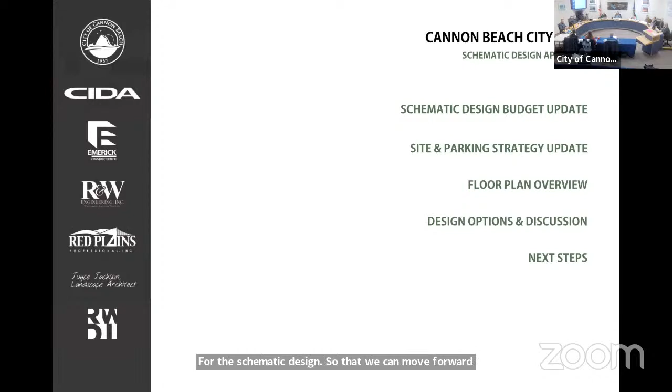To the budget update, what you're looking at here, and what I believe was in your packets on the left-hand side for reference, was the budget that we reviewed in the past, back in March. This was where we were at conceptual design. The budget then was based primarily off of the size, square footage of the building. The current schematic design estimate is where we are now, so more building details, and this represents both projects combined as an overall.

The good news here is that our grand total, even though some things have shifted, is actually slightly less than our initial predicted total budget. This includes both the construction costs and the soft costs. So the numbers we're looking at here are all inclusive of the project, including design fees, jurisdictional and permitting fees, things like furniture and fixtures, and other professional services—some that have already taken place, like the site survey and the geotechnical report. All of those elements are captured here in this overall budget.

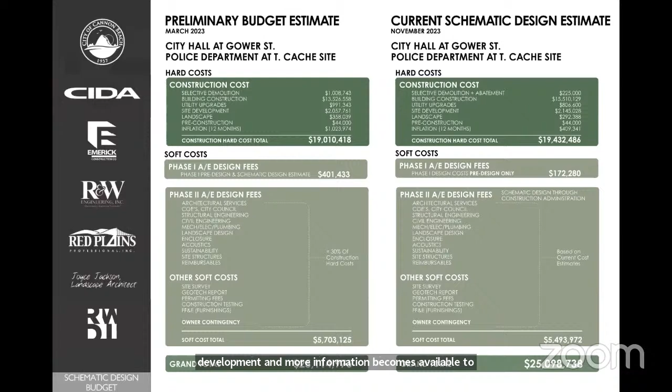Is there a reason the inflation costs were lowered by $600,000? Part of that was we had a little bit of contingency in that initial inflation number. The other part is we were six to seven months further down the road and closer to actual construction, so that was one of those contingencies that was a function of time, and time has moved on, and we're closer to construction.

Thank you. And how about the selective demolition? We had some hardscapes included in that, which shifted into the earthwork side of things, and the demolition, of course, is just for this project, including the abatement. So that's where you see that reduction.

One thing I want to remind everybody is that the initial preliminary design we did, because it was really based on building size and footprint, used a different estimating format called Uniformat, which really buckets everything into four or five categories. Now that we're starting to have plans and additional details, we're into CSI format, which breaks down every piece of the building into 20 to 25 divisions. So if you start seeing some shift in where the dollars were in the initial estimate versus the schematic design estimate, that's why — because we have more buckets to appropriately put the dollars.

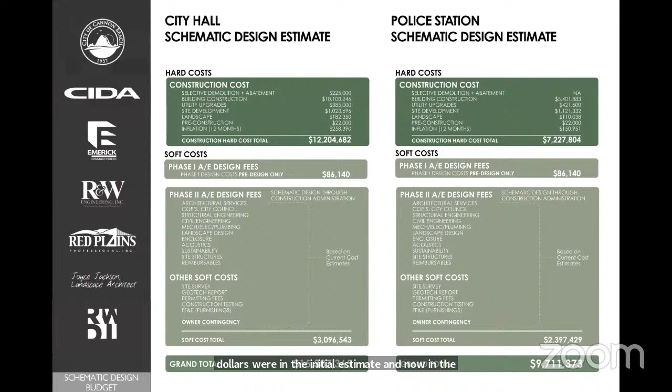Okay, thank you. I have shifted on the screen to the breakdown of the two different projects, the city hall on the left and the police station on the right. Very similar format. These are both the schematic design estimates, with totals at the bottom. The sum of those is what we were looking at on the previous slide.

I think one of the takeaways is that the police station went up a little bit, but the city hall went down, so the balance of the two is actually on track. As we move on, you'll see all these categories populated with numbers as we get to them.

I do want to say, the soft cost piece, although they're not broken out each piece, they are broken out on spreadsheets that we have that we're confirming each of those numbers, and the tally is what you're seeing, but each number is being vetted. So we'll see that filled out.

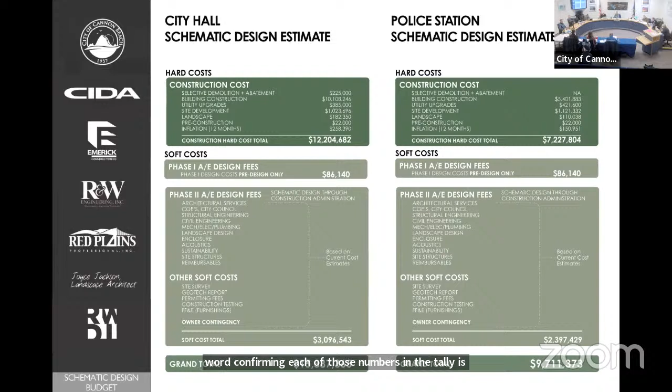Yes, certainly we can do it that way. I think for this format, we thought this was easier, but we have it. Yeah, because as Jordan mentioned, we were carrying that 30%, and we're at that point now. Everything needs to be vetted out, filled out, and calculated so that you have a true number.

Any more questions on the budget side of things? Not at this point for me. I think we're okay.

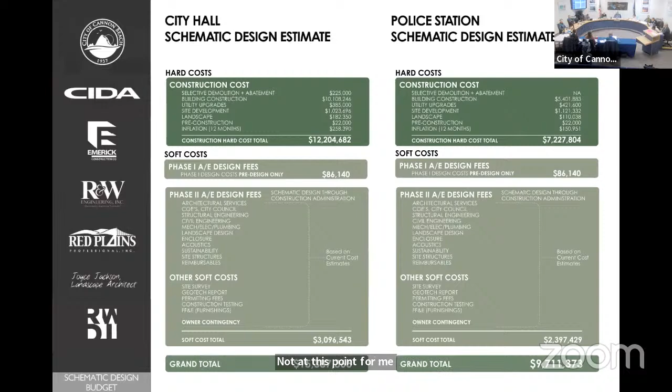So the site here is next. We have been exploring the possibility of adding accessible parking near the building entry. We talked last time about the potential of doing that on the south side of Gower. So this illustrates what we've been thinking and how it might work.

This shows 2 parking spaces added along Gower. They're both parallel parking spaces. One is an ADA accessible space. The second one here we've envisioned to be a time limited drop-off space, so that could be the function of either dropping someone off, dropping off a ballot, or coming in for a quick transaction. That would be our goal.

So the other thing illustrated here is how the slopes might work to make this function. What we've envisioned is that the curbs slope down to the parking level so that there's a smooth transition between those parking spaces and the sidewalk. The sidewalk we've jogged to wrap around those parking spaces. And then the area in a little bit darker gray shaded, that would be sloped to get from that lower area of sidewalk up to closer to the main building elevation.

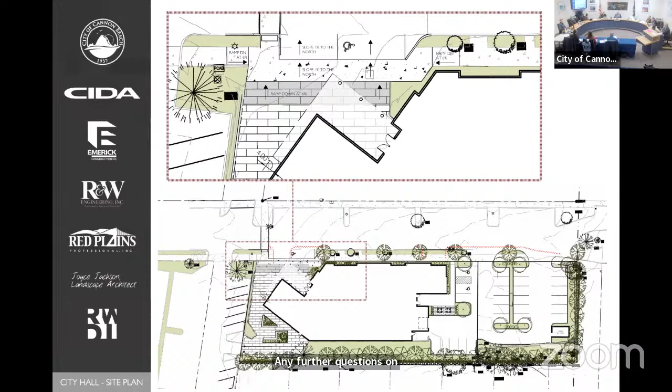And they love it. We don't believe it yet. That's understandable. Boy, I bet HRAP is happy.

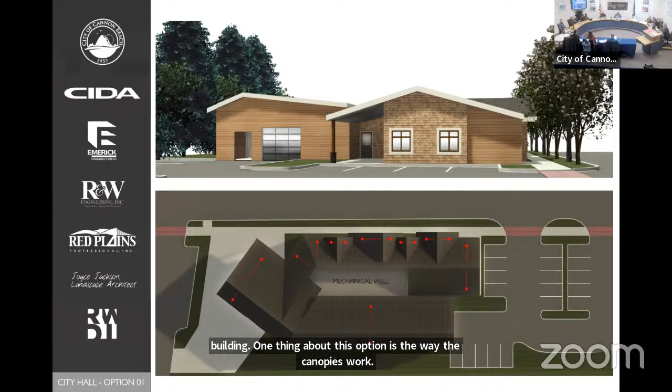What we're looking at here is something you've seen before. This was option one from our last meeting, included just as a reference. This again is option one, the back side of the building. One thing about this option is the way the canopies work - they're a continuation of the roof slope in this option.

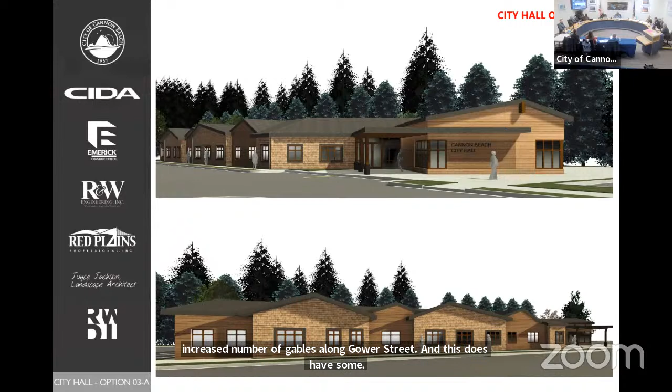Option 3A - this one is new this time. It combines the flat canopy of option two and that weather protection with the increased number of gables along Gower Street. This does have some change in colors. It's got the recessed portion a little bit darker stained cedar, and this one does have the darker trim, which was an element of option two last time.

I knew that there was something that was different. I knew there was something I didn't like as much, and that is the darker trim. I like that white - I thought the white trim really looked much more neighborhoody. So I'm sad to see that gone. Wait just a minute. Me too, please.

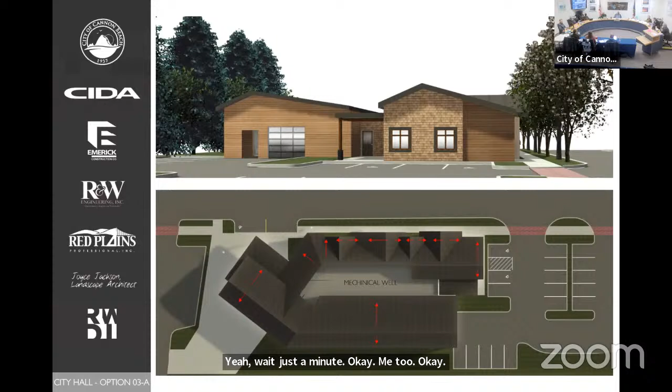So on the back side of this one, we also replicated the language of the canopy and made this canopy on the back side mimic the language on the front side. So it's a flat canopy rather than the roof continuation.

So 3B - this one is similar to what we just looked at, but we did change that trim color to go back to the lighter color. And we increased the contrast, so made that stained color on the recessed portion a little bit darker so that those would recess a bit more.

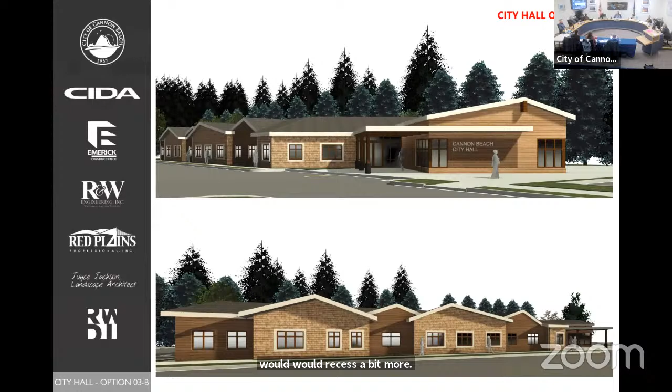Can you quickly go back to the other one, just to the first one? Like an eye exam. You see this one better or this one better? I can bring those up side by side if that's helpful too. No, I'm fine now.

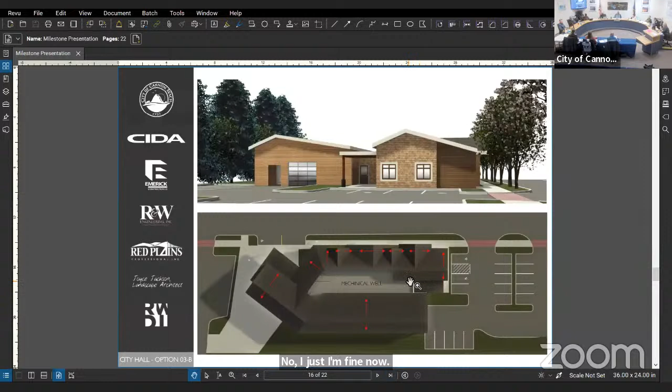Very similarly here, this has the flat canopy at the staff entry to reinforce that circulation spine overall in the building. On the roof here, you can see we still have the mechanical well, that flat portion in the center, which allows us to have the daylighting on the interior of the building, clerestories.

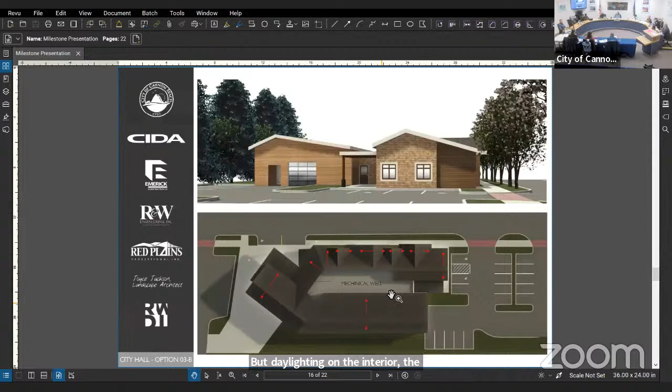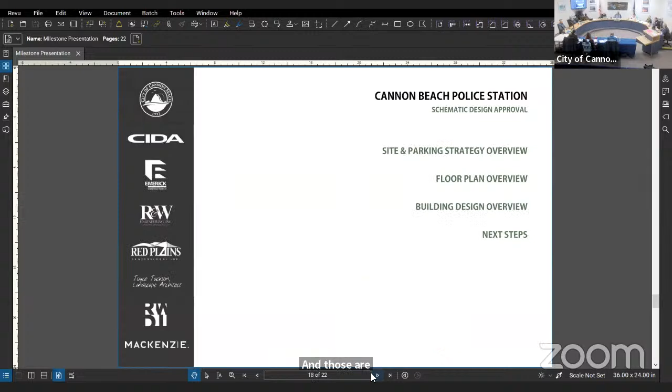And this is the council chamber, again very similar to the previous iteration. And those are the images we have for City Hall. So before we move to police, I can go back to address any questions.

Well, I think that 3B looks the least industrial of all of them, and the least administrative - it just fits more in with the character of the neighborhood. I think it's a good job.

I have a question for council. We have the two projects you were talking about tonight. Do you want to stay on City Hall, ask questions, then make a decision on whether you're ready to release for design development, or would you rather see both projects and then have that conversation? It's better to have the questions after each one, so people online can answer questions. Stick with one at a time. Gary? Okay, that's it.

In that case, I think that completes our presentation for the city hall portion.

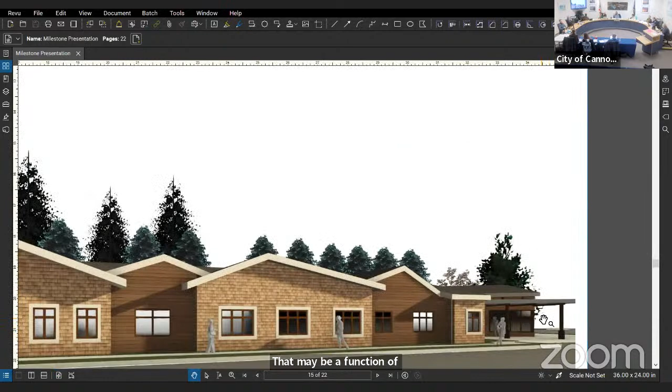I have a question on this one right here. The overhang canopy appears white here, but on the lower, it's the darker color. That may be a function of the shadow, or the sun direction in the image. The intent would be that all of that match, the color of the fascia would match around the entire building.

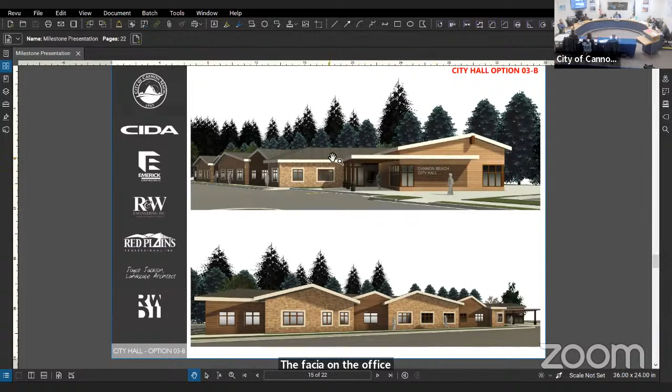And it does line up with the fascia on the office side portion too. Yes, so we've kept an eave height here that is consistent.

I think we're open to public comment and questions, and then we can ask our questions after, if that's okay with everyone. So anyone that would like to make public comment that's in the audience?

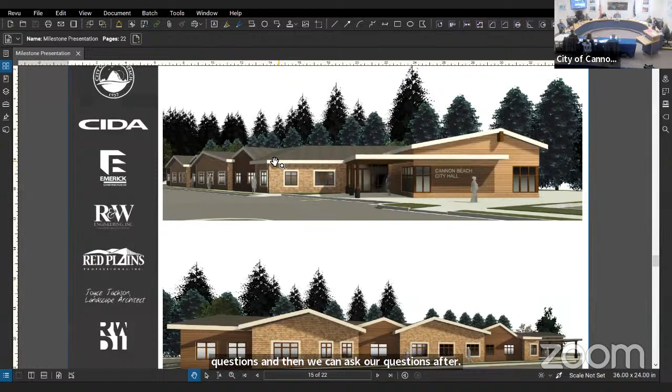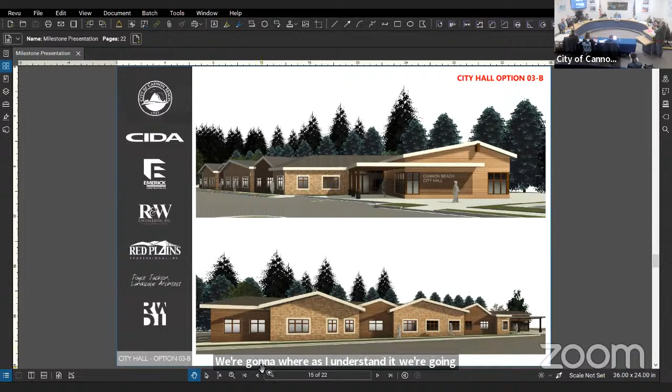Sinclair, PO Box 1394. I just wanted to make the comment that I really appreciate this process. I do agree that's the most neighborhoodly looking civic building I've seen in a while. And since I live here in this exact neighborhood, I appreciate that. And it didn't really come up, but I also appreciate the care that's been put into the backside of this, where as I understand it, we're going to have some tree separation from the houses that are immediately adjacent. And I know that those folks will appreciate it as well.

Good job, thank you, Les. Anybody else like to make a public comment that's in the audience? Jan?

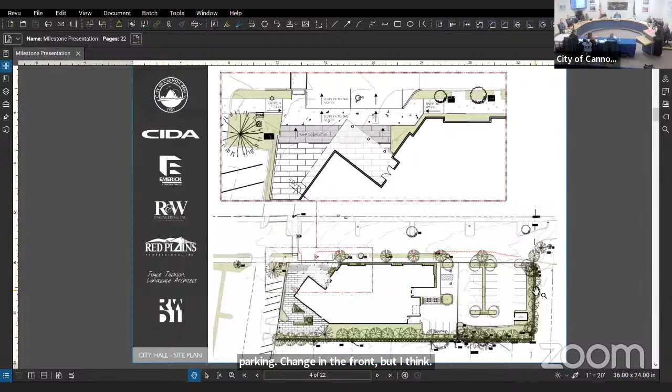Jan Siebert Warman, P O Box 778, Cannon Beach. I do like that last one. I agree with Les. I'm a little bit confused about the parking change in the front, but I think I remember it from last time, and so I think it's pretty similar to last time when we talked about it toward the end of the presentation. So I think it's okay. I think I'm pretty happy.

Thank you very much. Thanks, Jan. Anybody else in the audience? Okay, is there anybody online that would like to make a public comment? Please raise your hand if you do, now's the time.

Okay, so councilors, questions? Well, I like 3B.

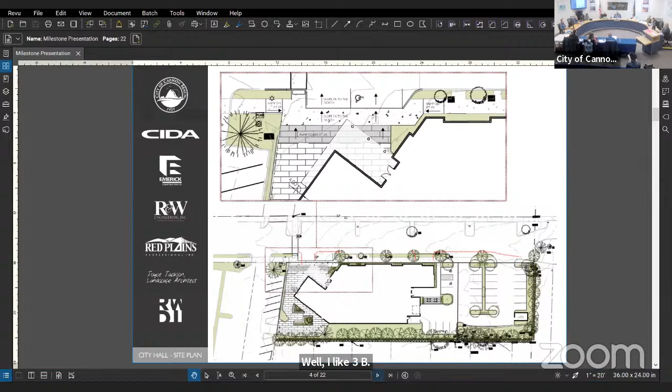Yep, too. I think my favorite is still 1, but I like 3B. Favorite is 1, yeah, I like the roof line better, at the front. Okay, but I'll go with 3B.

Yeah, I'm fine with 3B. The trim color doesn't matter to me, but I do like the darker shading to give it some definition. Such a great idea. That was Sam's benefit to me. Yep, Sam came up with that idea. That was great.

I like 3B also with the white trim, but remember, trims and things can be changed afterwards. Yeah, like aqua, maybe.

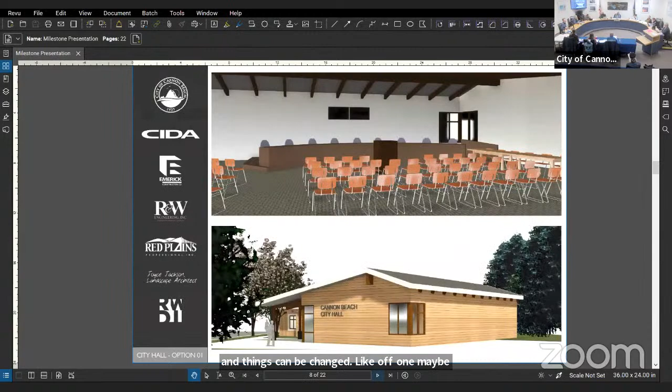Brandon, do you have any? I agree, but I could go either way on the trim color, but when we have time, we can change that as we work through. I think bright purple might be... well, it's my favorite color.

At this point, Bruce, you'd like to get some decisions out of us? It's up to you. I mean, now would be appropriate, or if you want to wait. No, let's do both of them now, you can do it. My preference would be to treat these as we go over them. Just get it done.

So what is it that you need from us to move forward? This is the schematic design, and then the question is, do you want us to move on to design development, which is the next level of detail?

Do we need a motion for that? I would like a motion if you can. Anybody willing to? Yeah, Jordan, did you want to say something?

I just wanted to say one thing before we close the loop on City Hall. Jan had asked me last meeting to provide a cost for the additional dormers on the Gower Street side, and I think that was the look that everybody liked. So I just wanted to let you know that they're about $5,000 a piece to do that over framing, so it's not an expensive cost for that look, if that's what you're looking for. Thank you, Jordan.

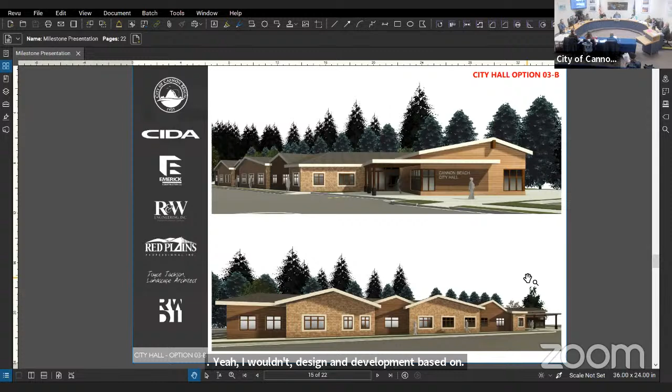Is that we're gonna actually approve the schematic though, right? And move to design development. Correct. Yes, you want to change it to that? How about I move to approve the schematic design with option 3B and move on to design development? It's exactly what I said. Okay, great, and I second that. Seconded. Any further discussion?

Okay, roll call please. Councilor Ogilvy, yes. Council President McCarthy, yes. Councilor Nichols, yes. Councilor Kerr, yes.

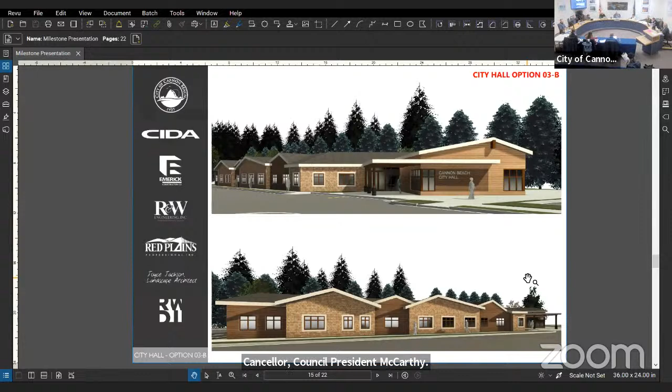Thank you. Onward now to the police station. So here we have the things that you've seen previously, starting with site, then we'll look at the plan and the building design renderings and overall views.

The site plan again is responding to our civil engineer's analysis of the grades and the cut and fill that's required, so the parking is accommodated at. It has been brought to my attention we won't be using this as a helicopter landing pad as we thought we might. It sounds like there's other options available in the city. We're not getting a helicopter.

What are the other options? There's one right up above. There's actually two other helo pads up there, on Southwind, up the logging road. We've used it before for that, and they work. Okay.

What we are currently evaluating is a couple options for fire truck access and turnaround. We have a few things that might work for that. One of them would involve giving the fire department access to the secure gate, using that turn in there as a potential fire truck turnaround. That's something we're still exploring.

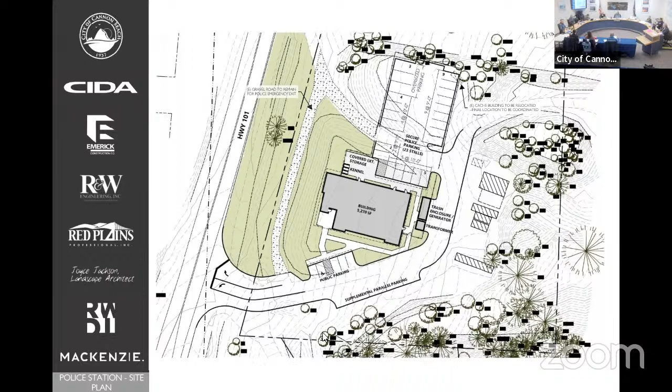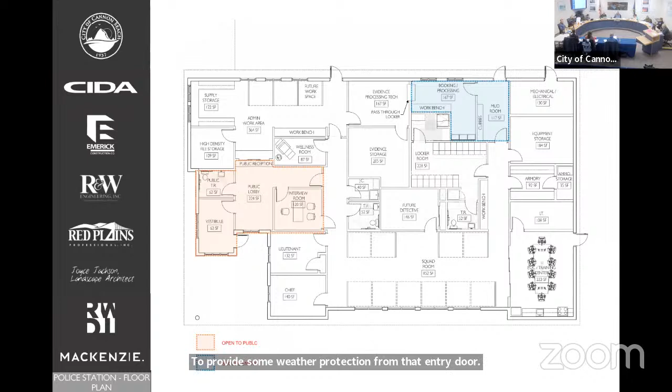The blue area in the back, that's the secure entry area. This would be an area that was secured if officers were to come in with either someone in custody, or this would be where they would come in with evidence as well, leading directly to their booking and processing and evidence processing.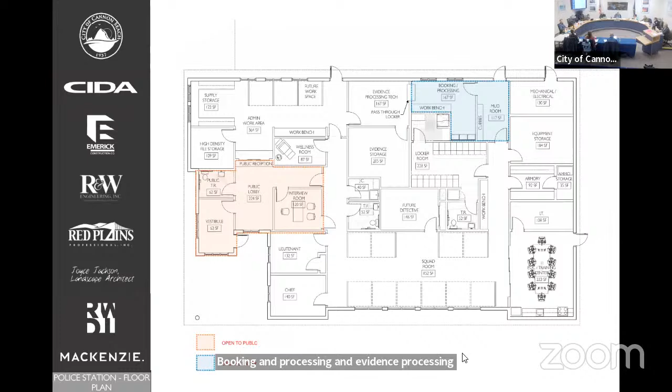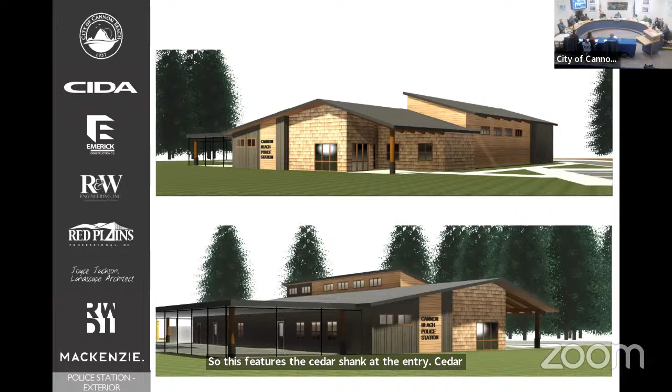These are updated images of the building shape and materials. This features the cedar shake at the entry, cedar siding at the squad room, the signage band, and we're continuing to explore material for the darker material around the backside of the building.

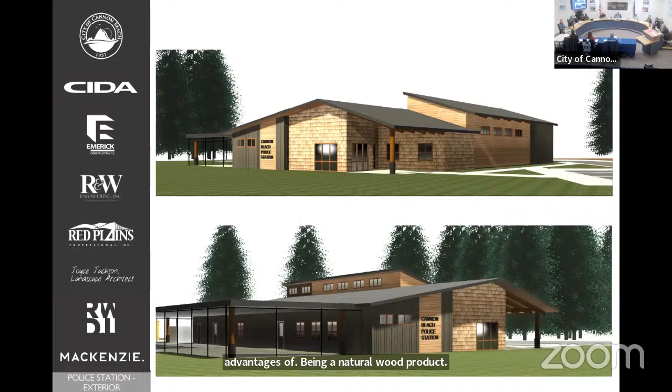We've talked previously about whether that be a cedar product or a fiber cement panel of some sort. We did reach out to our envelope consultant, who did an environmental comparison of those products and has come up with another option that we're looking at. It's an engineered wood product, so it has the advantages of being a natural wood product without that cement component, but because it's engineered, it has some of the advantages for maintenance as well and durability. As we move towards design development, those are the kinds of things we keep digging into as we move the design forward.

Those are cost saving materials, and the fiber cement material would be a cost saving material as well. I don't have all the information about some of these other options and how they compare to, say, the natural cedar siding. There could also be maintenance advantages to the engineered material. When we get into DD, we'll be doing cost analysis on the material types as well.

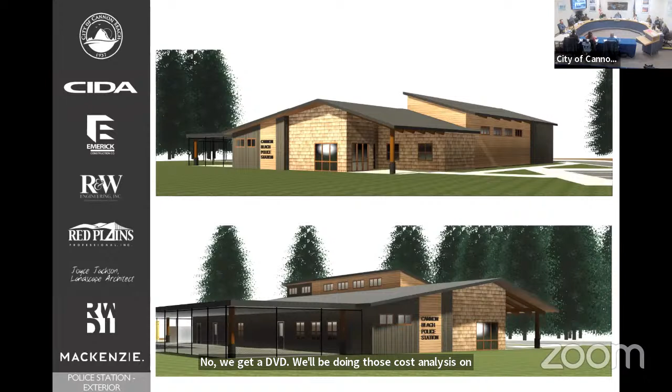The third option discussed, have you seen that in a building? I have not. So what we're working on is getting samples of that material so we can put eyes on it and fully evaluate it. If we determine that it's something we'd like to bring and present beyond that, we'll also be asking where it's been installed, for the durability of that install, and do that vetting of the product that way.

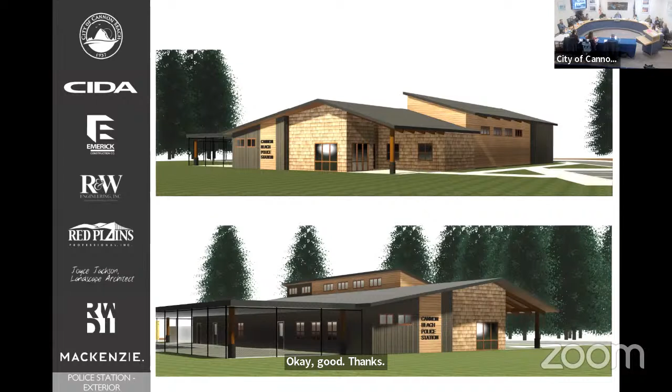The cedar and the fiber cement, we know they're tried and true, so they're not of question. The final thing I have here to share is just an example of our next steps, where we would be going in terms of drawings. This also illustrates the back sides of the building that we haven't fully shown previously.

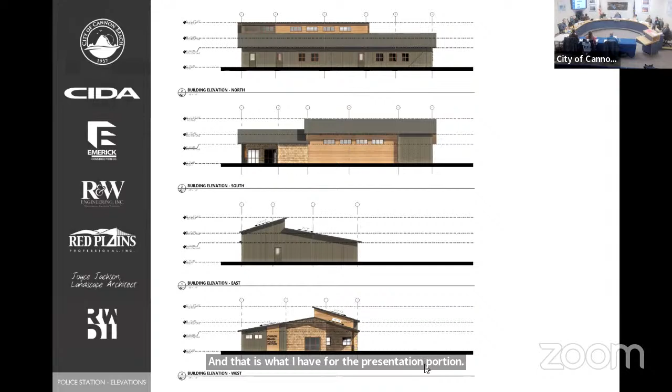Okay, I think we'll go ahead and open it up for public comment, if that's okay with everyone. Is there anyone in the audience that would like to make public comment on the police station? Jim?

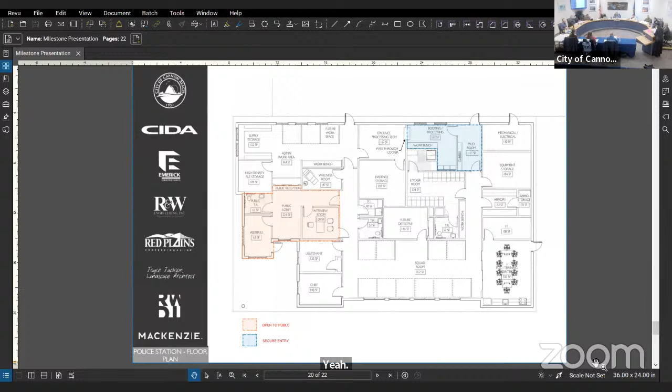Is there anyone online that would like to make public comment? You can raise your hand if you would like to. Great, thank you. Questions, councilors?

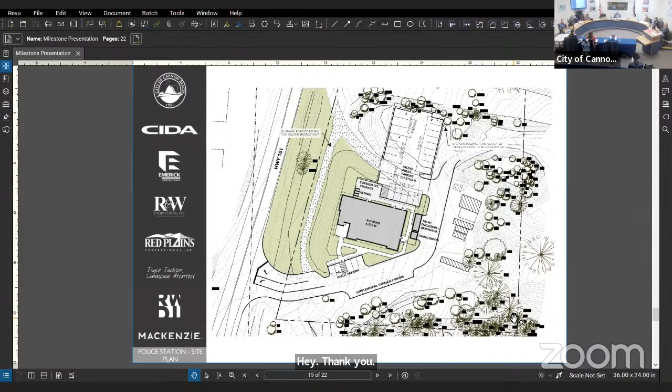Our paper packets include design option 2, but I don't think any of us— that was a top choice for any of us, was it? Well, with the disconnected roof. I think we presented option 2 last time, and my understanding had been that the preference was option... currently, so if we approve, it's what we're looking at there. Yes. And you're okay with that? I'm fine with that.

So Lisa, do we have any questions on the assumptions on this project? No, I think those were answered. Thank you.

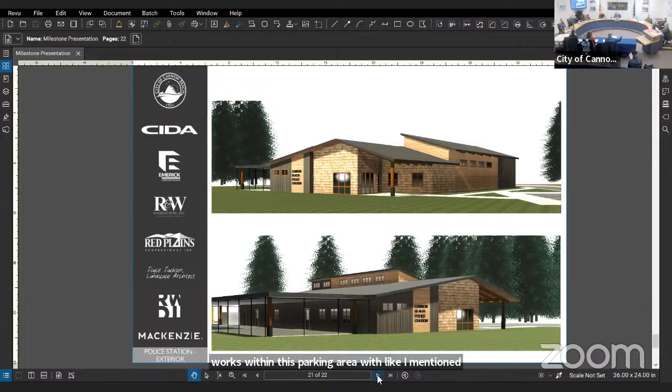Like, no. So first we're going to look at setting up the modulars and doing that, but we need to see if that works within this parking area with those other activities that go on - the farmers market situation there, and displacing. I see you guys have the food carts out there during certain parts of the year too, and the farmers market as well. Sorry. So, open - yeah, how much space we need and how that correlates to those activities.

Okay, and then I guess specifically, I would ask, how does that affect how we would actually conduct this city council and all the other meetings? Yeah, so there would be - we'd set up double wide modulars and there would be big rooms. We'd try to recreate your space, just some sort of approximate square footage equivalent. Is that what you're saying?

Okay, staff has been listing potential locations that we could rent on an ongoing basis for council meetings, planning commission, that sort of thing. So is this space already built and we wouldn't put modulars out in that space, or is it vacant land? Well, if we were to rent space for the meetings, it would be already built then. It would be already built, and it would be used by other people too, but we would have a contract for certain nights.

So we're looking at the options that fit best for the city, fit within the budget. We also just did some repair work on the luminaire, the trailer out here - put in a new floor, that kind of thing, so that the department or somebody can move and stay in that. So we've already got one of those available, and we're looking at other locations. For example, is it possible for Public Works admin to work out of Public Works up by the RV park for a period of time? So what we're trying to do is reduce the load that we have to displace, or that we have to actually house, and work from there.